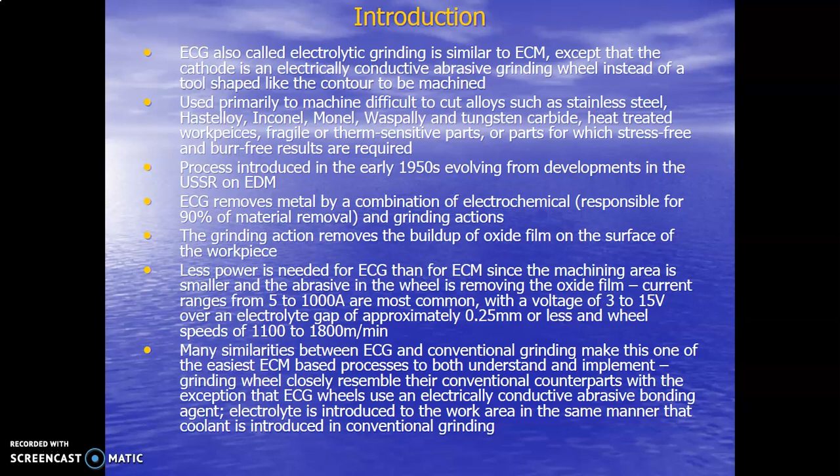Many similarities between ECG and conventional grinding make it one of the easiest ECM-based processes to both understand and implement. As we discussed earlier, these two processes, electrochemical grinding and electro discharge grinding, are both hybrid technologies developed from the conventional as well as the non-conventional part.

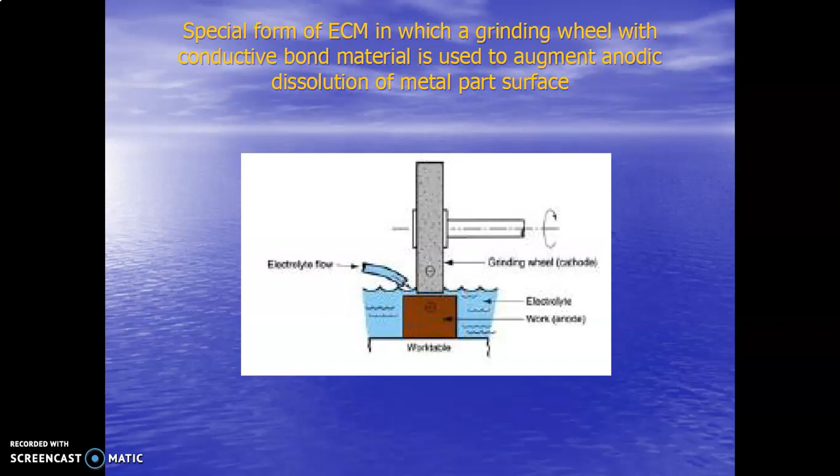But the difference you can see in the figure. Here we have an abrasive that is an electrically conductive material. This is a simple schematic diagram: the wheel is rotating and it is also an electrically conducting material, negative and positive. Here we have the electrolyte. It's the same process as ECM; the electrons travel positive to negative and negative to positive. In between, it also removes material, because at the same time we are supplying the electrolyte and the grinding wheel is rotating.

You can see the workpiece is connected with the positive, the grinding wheel with the negative, and we are using an insulating sleeve. As we supply current to the grinding wheel spindle, it rotates but also carries the current, because it's an electrically conducting material we are using as the abrasive wheel. The positive and negative ions generate the ionizing process of the electrolyte, so it also removes the material.

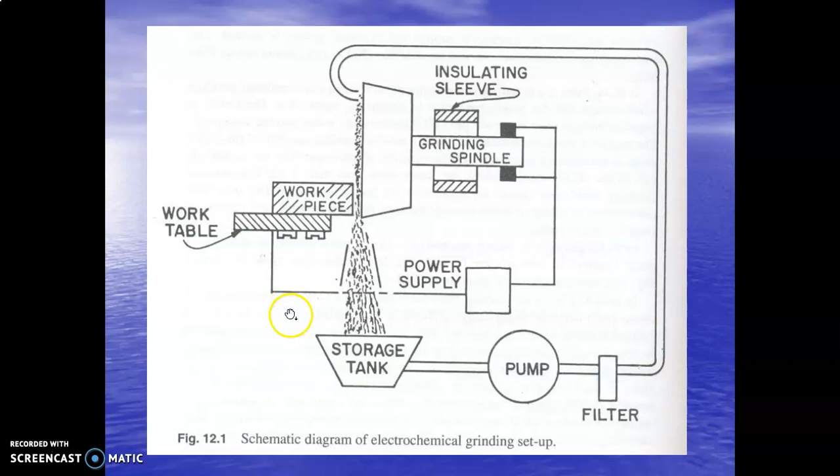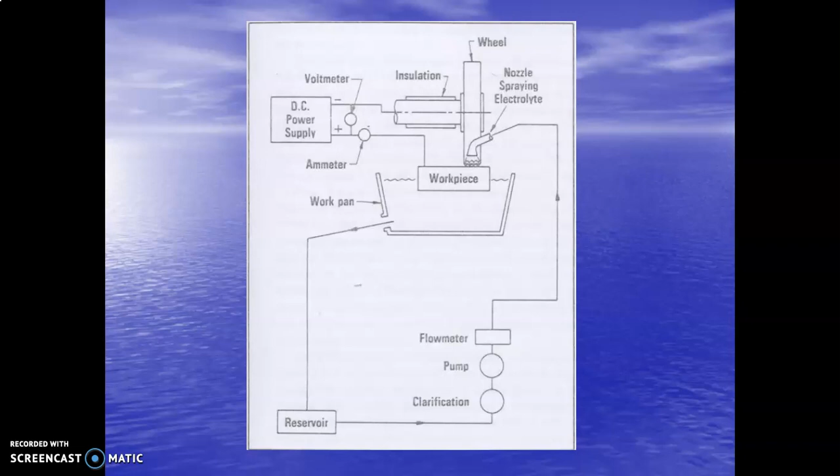So here is the same arrangement, but in a different form. You can see here it's basically expanded. You can see the DC power supply, positive and negative, is connected with the grinding wheel, and here we are using insulation. And the nozzle spraying electrolyte material, basically the workpiece, and then the whole setup is filled with the electrolyte material, the same arrangement as we have discussed in the last slide.

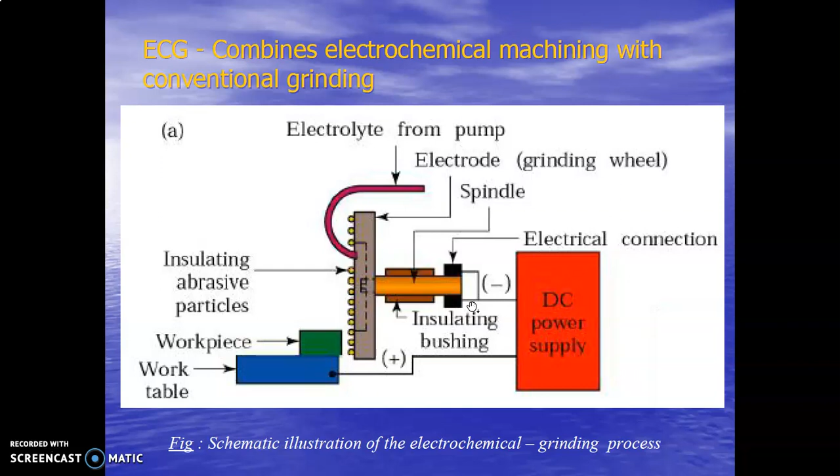So the electrochemical grinding process combines electrochemical machining with conventional grinding, as we have discussed earlier. So the arrangement is very simple and machining is also very simple, but you have to remember the principle of how the material is eroded from the workpiece. So it's a schematic diagram of the wheel.

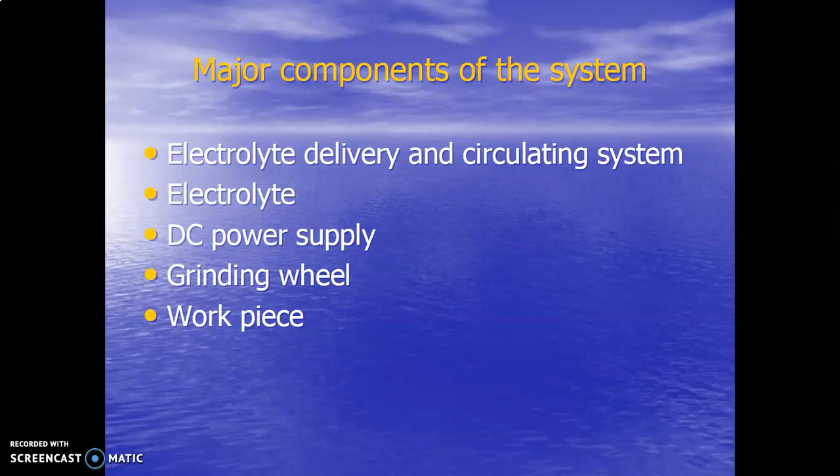Now the first system is the electrolyte delivery and circulating system. The electrodes are not totally immersed, yet there must be an ample supply of the electrolyte. So actually the grinding wheel, you can see that it is not fully immersed in the electrolyte material. What are we doing? We are supplying the electrolyte material between the workpiece and the grinding wheel. Nozzles are used to ensure the proper wetting action on the wheel.

So we are not supplying the electrolyte material full fledged, because it is a very concentrated process, because the surface contact between the grinding wheel and the workpiece is very less. So we are using the nozzle. The nozzle creates a partial vacuum and causes the electrolyte to be sucked up and fill the cavities around the grit. And rotation of the wheel then carries the electrolyte into the area of contact between the workpiece and wheel, as we have discussed.

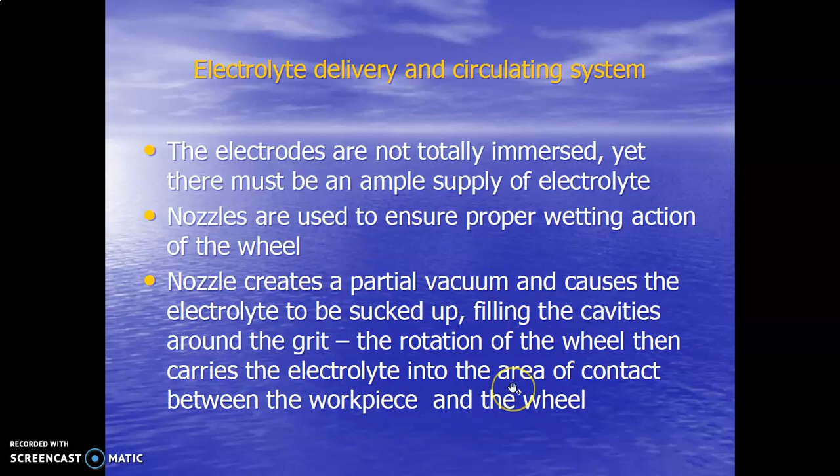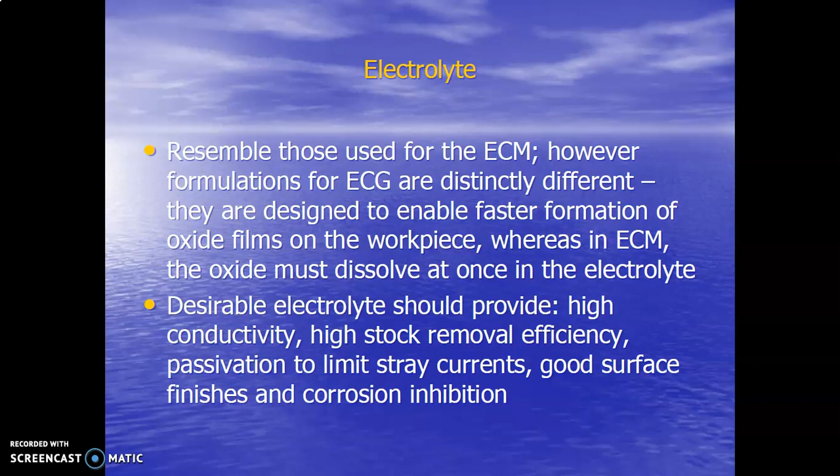Electrolytes resemble those used for electrochemical machining. However, formulations for electrochemical grinding are different. They are designed to enable faster formation of the oxide film on the workpiece, whereas in the electrochemical machining process, the oxide must be dissolved at once in the electrolyte. So the desirable properties are high conductivity, high stock material removal efficiency, passivation to limit stray current, good surface finish, and also corrosion inhibition.

Next is the grinding wheel. The abrasive grains in electrochemical grinding serve three major purposes. This is basically the function of the grinding wheel. They act to wipe the oxide from the workpiece, exposing new metal and allowing the process to continue. As you can see, we have to constantly remove the upper layer which was separated from the workpiece.

So this is the main function of the grinding wheel, and it is providing the non-conducting media in the wheel, preventing direct contact between the workpiece and the generation of a short circuit. The cavities within the grit are filled with the electrolyte, and the grit acts as a carrier bringing electrolyte to the work area between the workpiece and the wheel, making the ECG process possible.